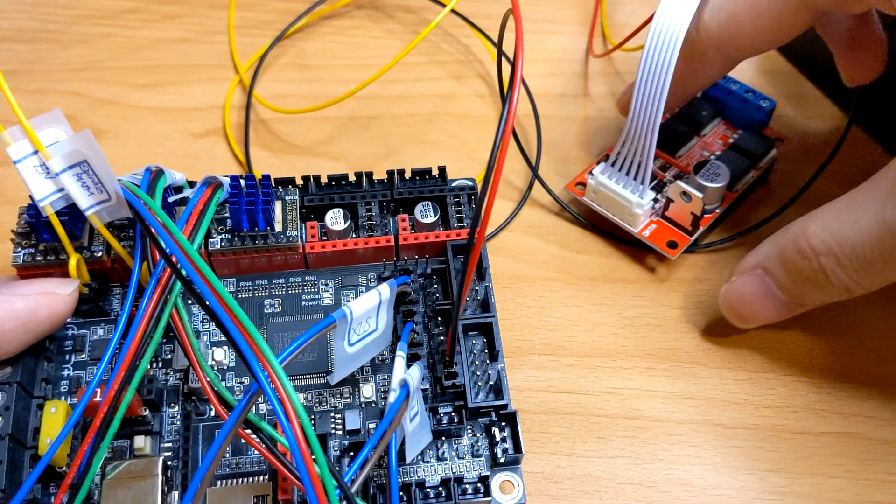Last video I showed the CNC electronics and wiring. Before powering them up, I plan to build a frame for them. Learn from Voron design and other industrial applications that use DIN rails to fix electronics to walls or boxes. DIN rails are designed to mount various electronic modules.

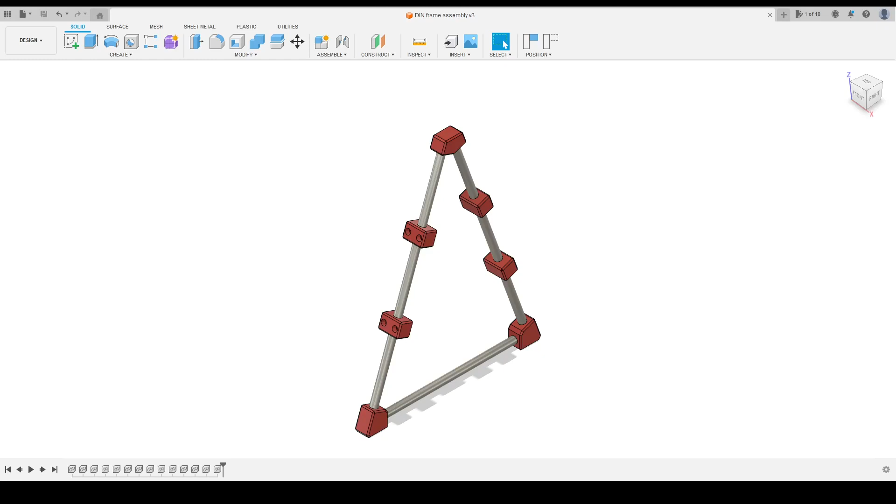For firmware testing purposes, the boards on the DIN rails require easy access to refresh the firmware. If the frame is also portable, it would be a convenient solution. I only need to enclose this portable frame to prevent direct contact with these electronics later when all firmware settings are tuned. Starting with the design, I need a frame with several DIN rails.

I searched for materials in my workshop and found a 1 meter long, 6 mm outer diameter stainless steel tube, combined with some 3D printed corners and mounts for the DIN rails. It should support all the electronics.

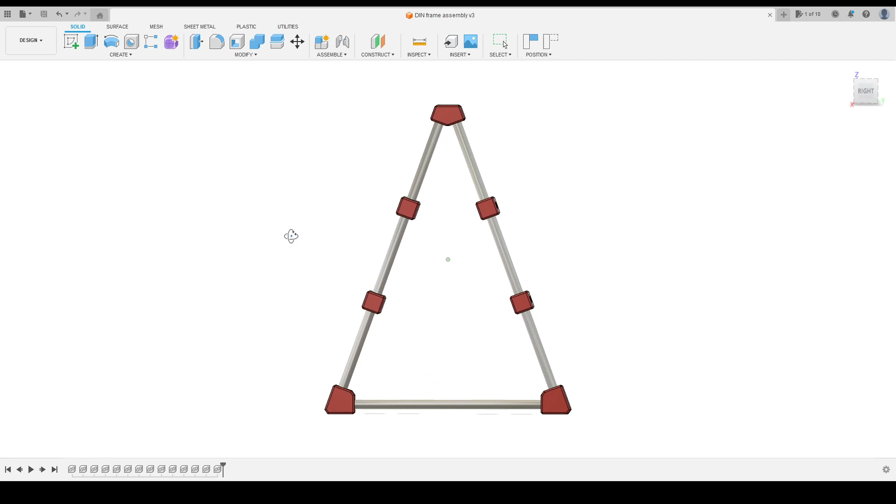The 1 meter stainless steel tube is cut into 12 60 mm tubes for the upper frame and two 127.36 mm tubes for the bottom connection. This design would be a pair of triangle stands with DIN rails to form the structure.

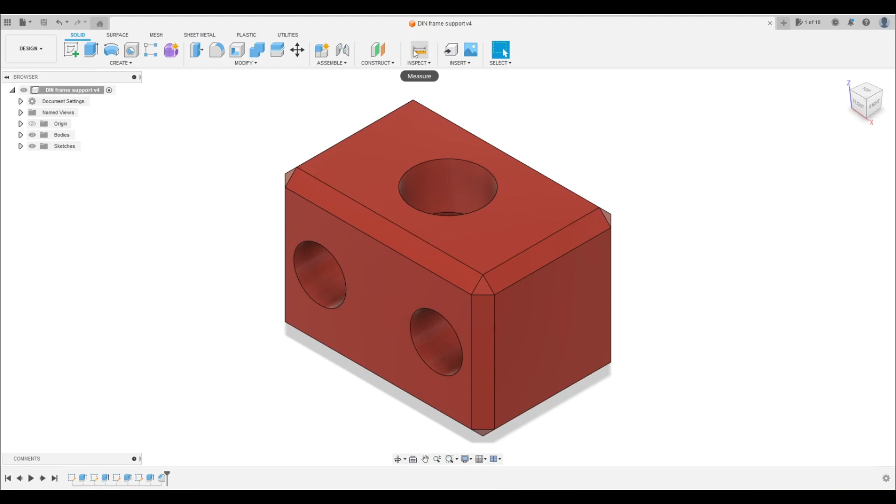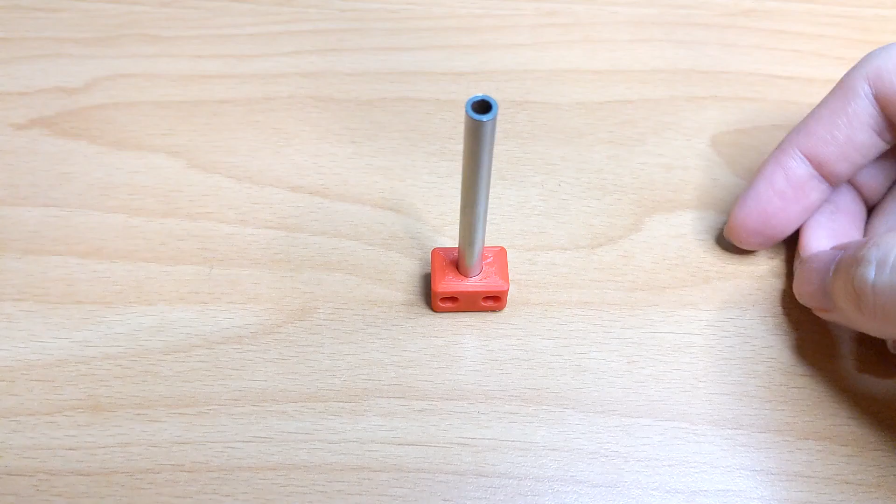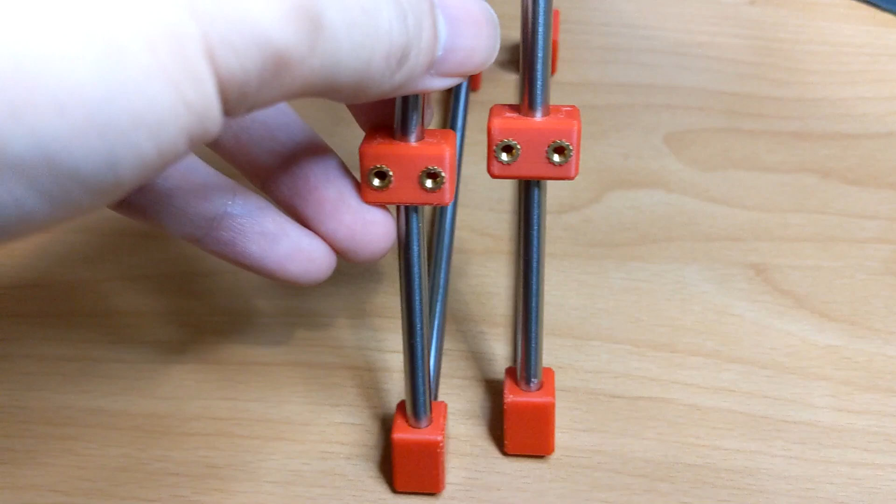For the printed frame parts, ensure the holes are tight for the tube's outer diameter. Additionally, DIN rail support parts require threaded inserts for mounting. Now start assembling. The tight tolerance holes require extra force to push the tubes into the parts. It would be helpful to have a flat surface to align the printed DIN rail mounting parts. After finishing the first triangle stand, repeat the same steps to build another one.

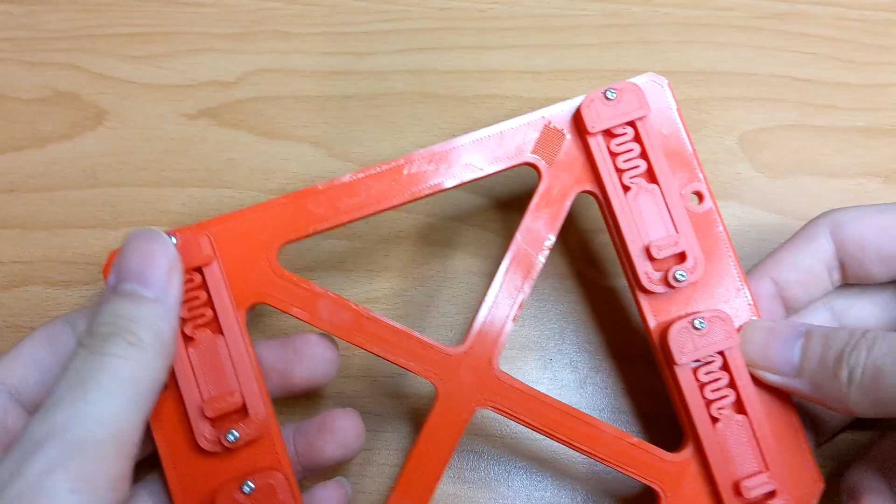The next step begins with the power supply and the power switch. The power supply itself has mounting threads for assembly. Utilize these threads with a bracket to fix them to the DIN rails. This custom bracket spans two parallel DIN rails to achieve a stable mount. For the clampers, I used the DIN rail clampers from Voron design.

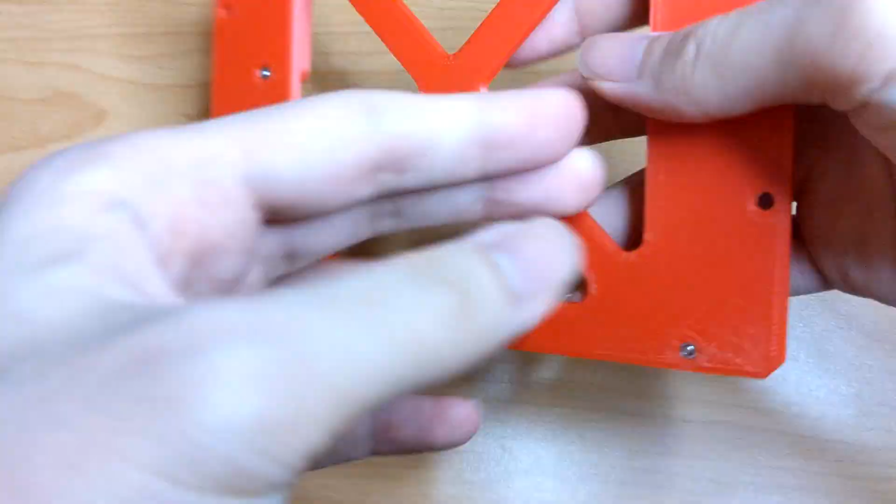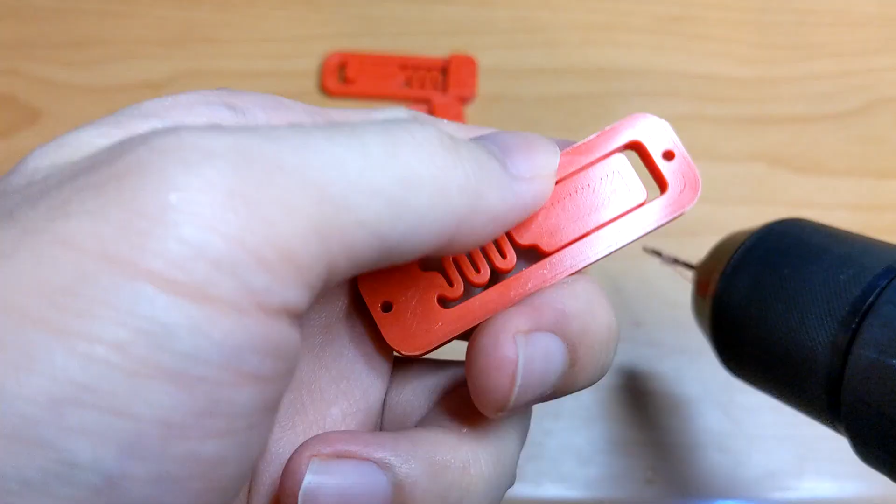The original clamper design is for M2 self-tapping screws. So I made some changes to enlarge these holes to fit regular M2 screws and install 4 clampers onto the bracket. After the clampers are installed, place and secure the power supply onto the bracket with 4 screws to finish the power supply module.

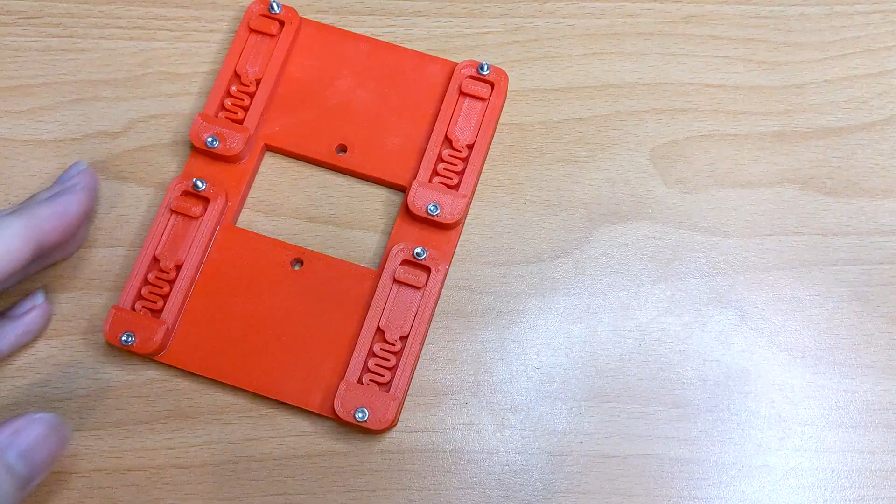For the power switch, I create a panel to isolate the pins behind the switch to avoid shock. The switch will be placed in the center of the panel to avoid interference with the DIN rails. Install 4 clampers on the panel's backside. Then insert the switch into the mounting holes and tighten it to finish the switch module. Lastly, there are the control boards which also share the same way to install brackets and clampers.

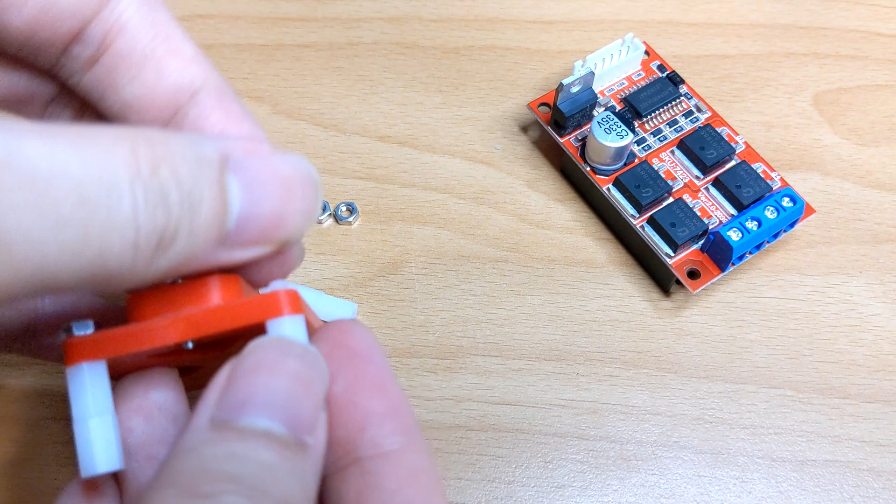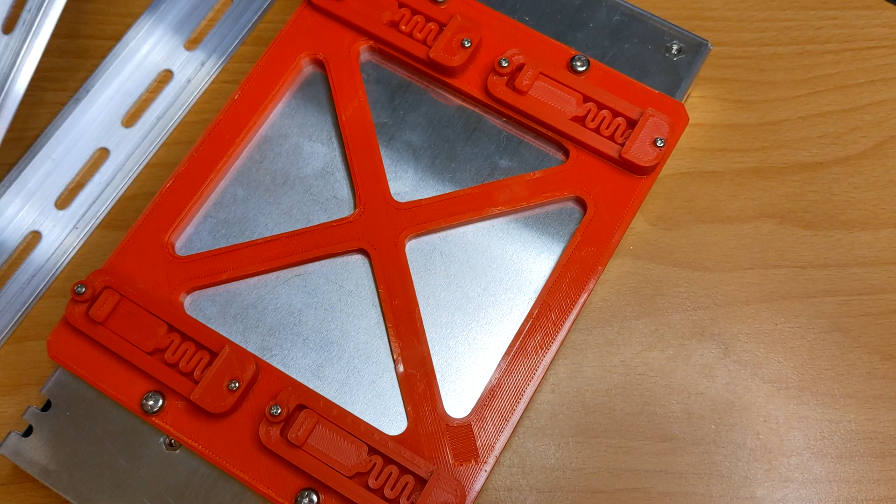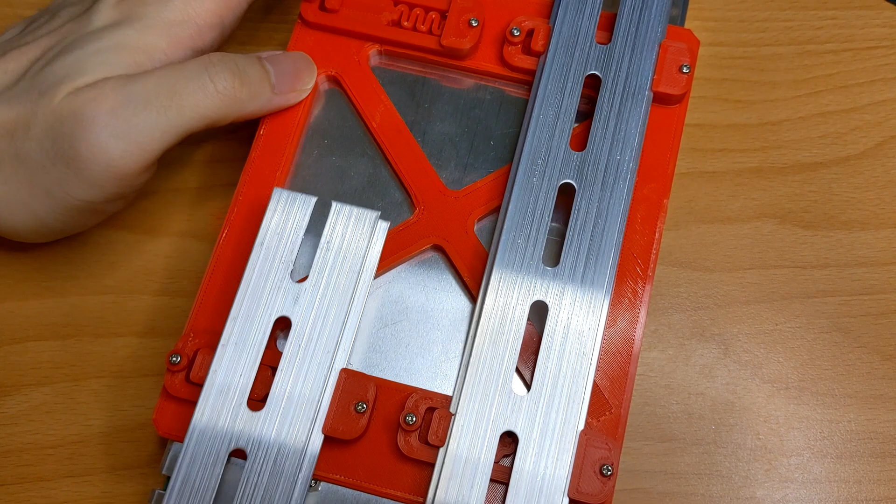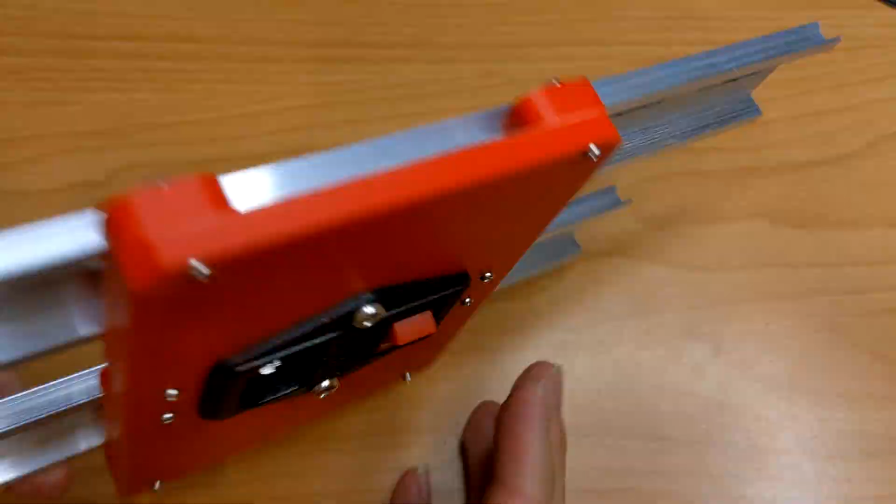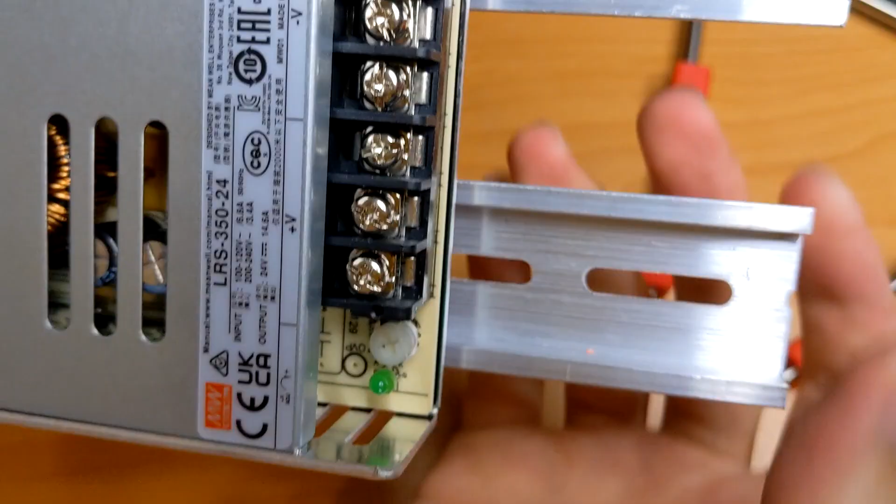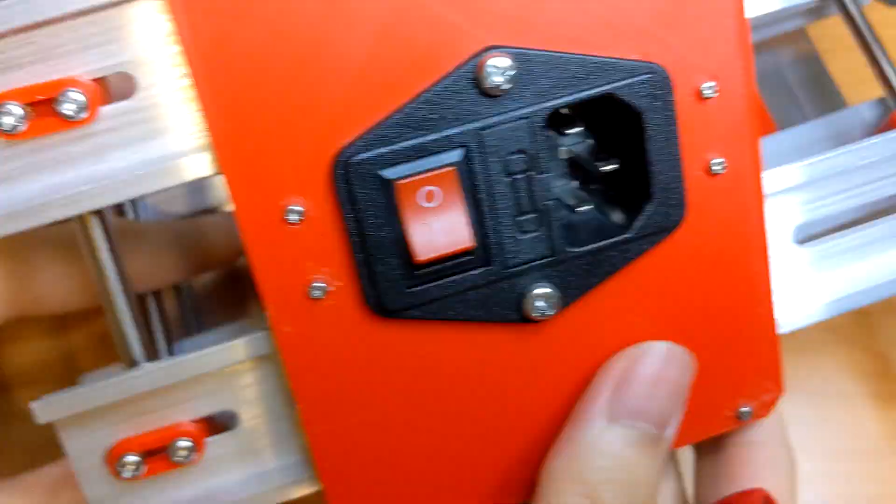After finishing the rails assembly, slide the power supplies to one side for DIN rail installation on the triangle stand. Align the DIN rails to the stand mounting holes and tighten them together. Repeat the same procedures for the other side. The frame should have a stable stand when two sides are connected.

In the remaining space, grab all modules for quick installation. Remember to consider the wire paths and board orientation. Replug all the connectors back into the modules and manage the cables. Use the space between two sides to hide extra cables. This is the portable DIN rail frame design and assembly.